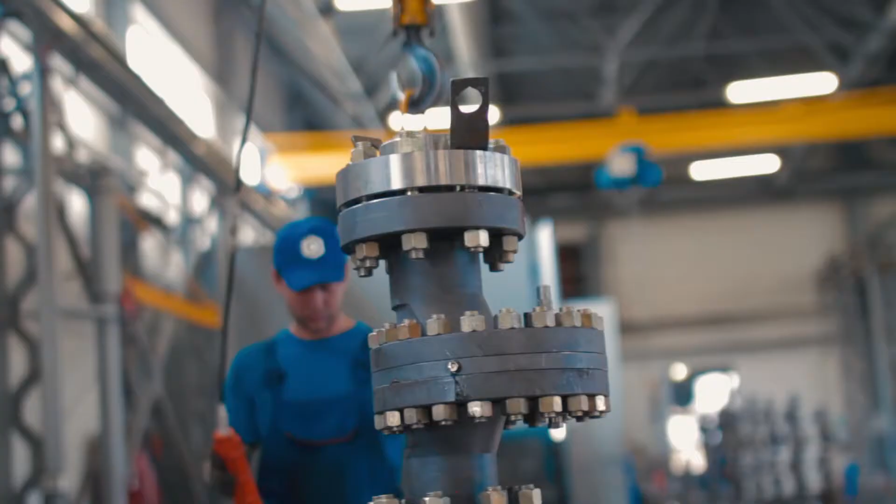Technovek is a multi-profile enterprise, the main production of which is oil and gas equipment. The plant produces equipment for sealing of oil and gas wells, shut-off valves, filtration equipment, water injection distribution manifolds for reservoir pressure maintenance systems, as well as group measuring units.

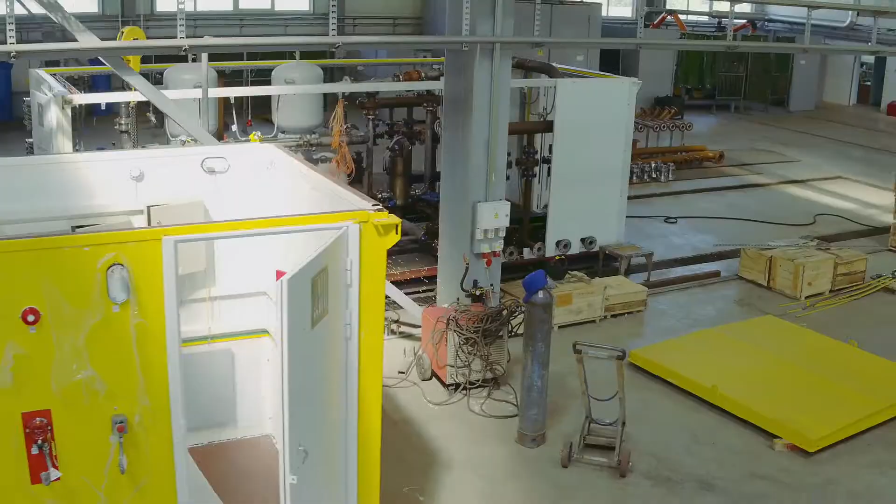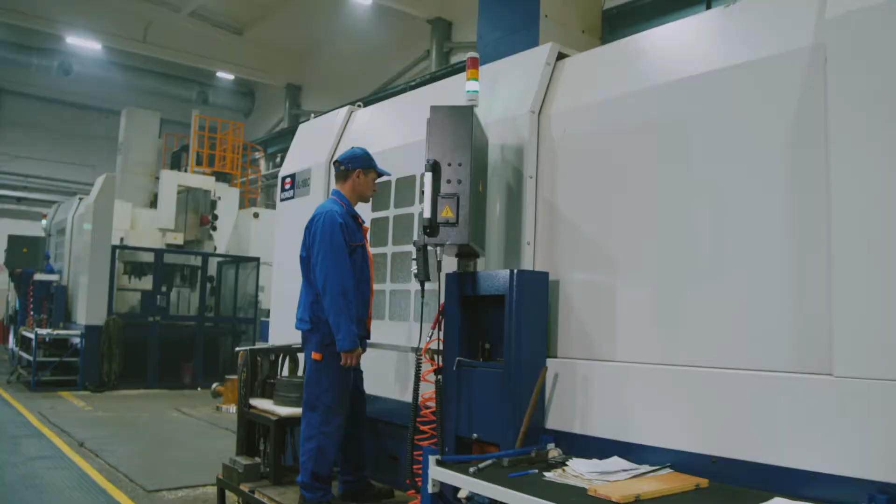The company has developed a comprehensive development program which secures the increase in production volumes and development of new products, increasing production efficiency and competitiveness, reducing the cost of products, expanding the market, and creating additional jobs.

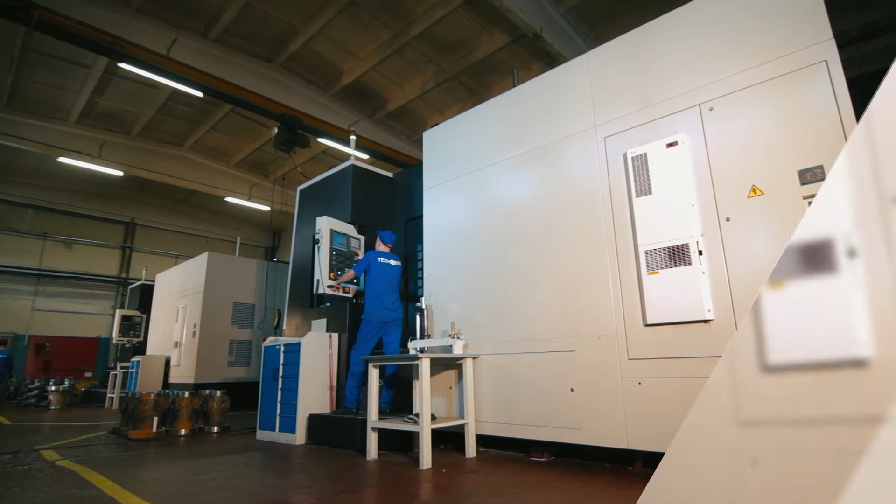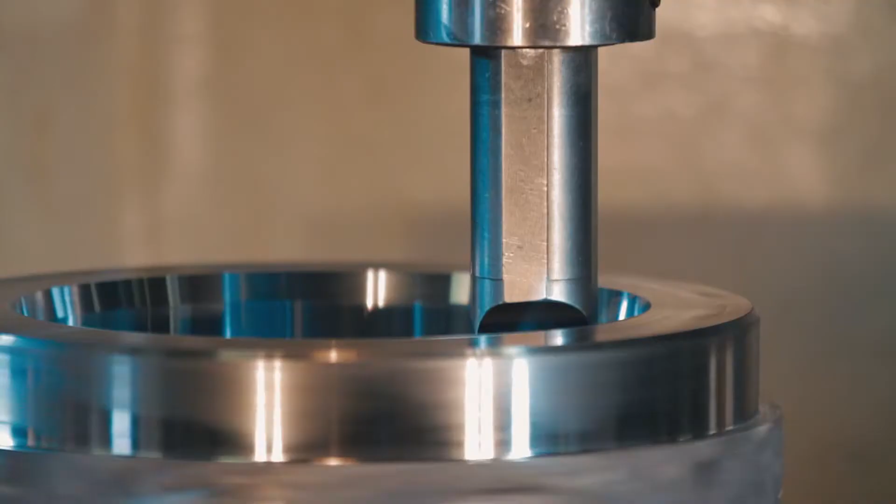The quality management system implemented at the enterprise meets the requirements of the national standard GOST ISO 9001:2015, which guarantees high quality of products at all stages of production. The manufactured products of Technovek meet the requirements of API 6A International Standard of the American Petroleum Institute for Wellhead Equipment.

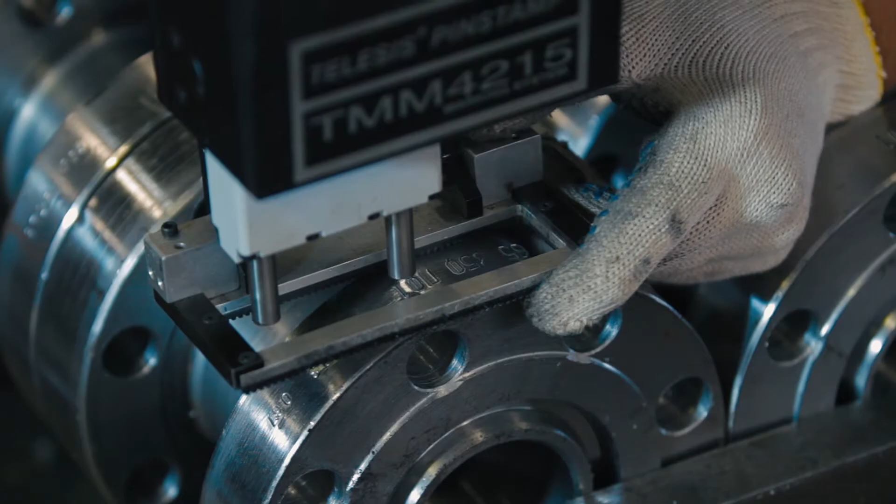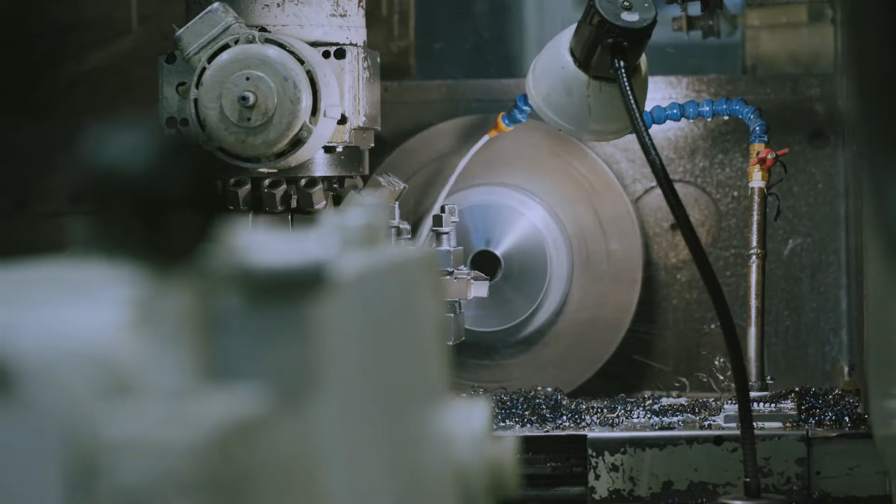The quality management system meets the requirements of Q1 standard. Production efficiency growth is one of the company's main tasks, which is solved by improvement of internal business processes by means of instruments for lean manufacture.

The Sightline Enterprise Resource Management System has been implemented. With the help of this system, the accuracy of strategic and operational planning, and integration of production planning systems with systems of design and technological preparation, is increased.

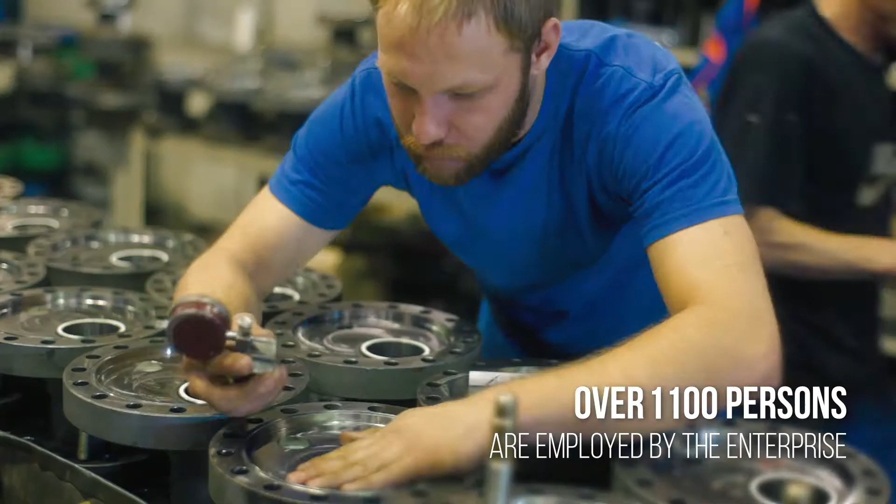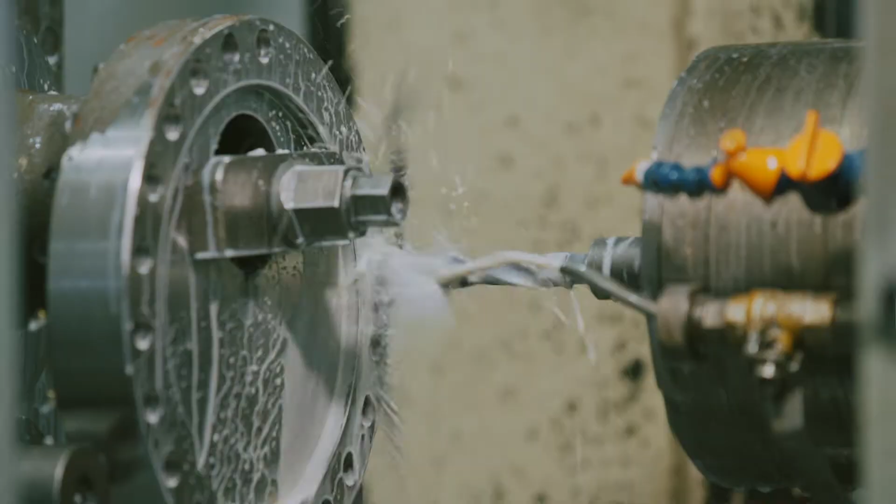The company employs more than 1,100 people whose average age is 35 years old. Besides decent wages and basic social guarantees envisaged by the state, the enterprise also offers each employee a number of additional benefits.

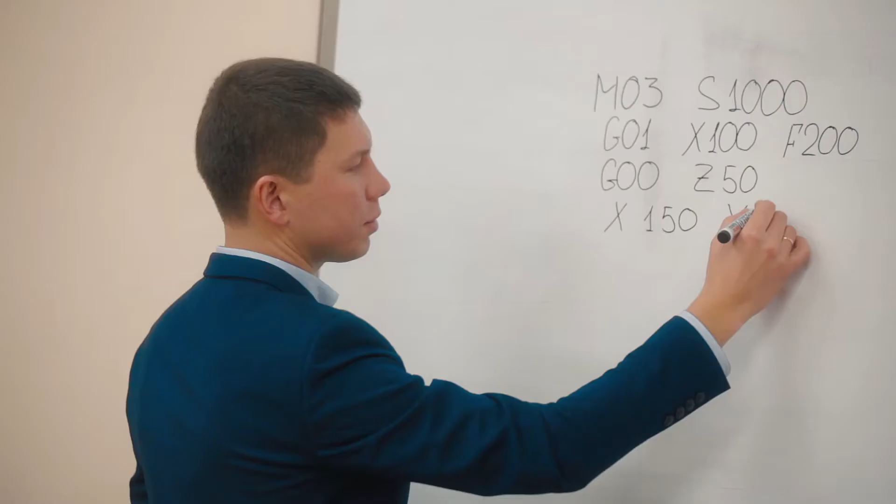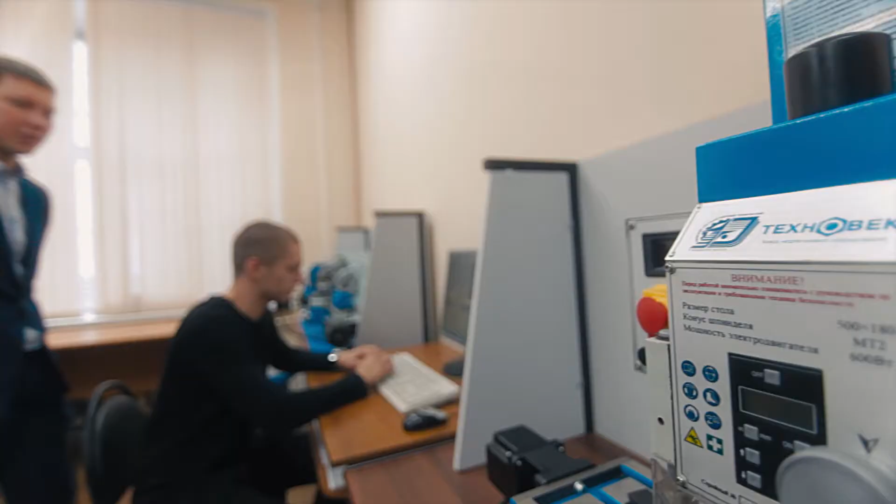A laboratory of CAD end-to-end systems works on the basis of the Votkinsk branch of Izhevsk State Technical University. The students have a real opportunity to get acquainted in practice with innovative high-tech technologies at the oil and gas equipment plant. Practical lessons in the equipment of the new laboratory will allow students to develop the skills and competence necessary for Technovek plant, as well as to carry out prospecting and applied research in the interests of the enterprise.

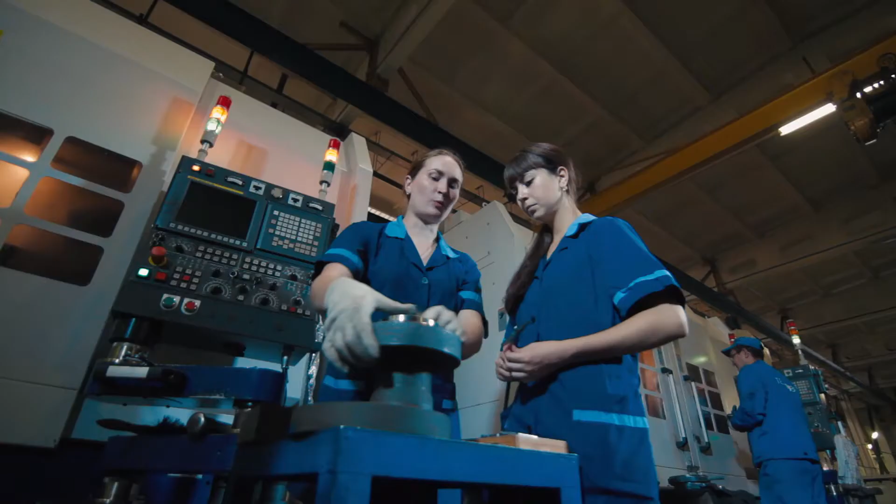During summer, 3rd and 4th year students undergo paid scientific and production practice. The students are offered a career at the enterprise.

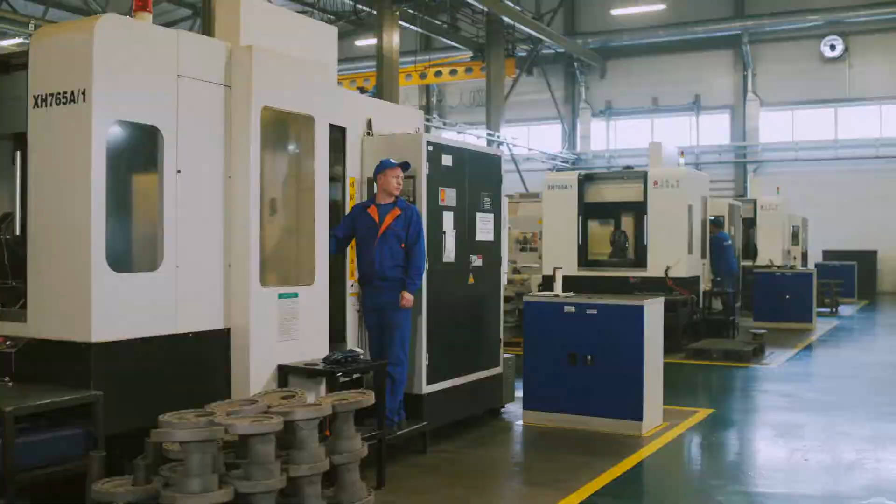The pace of technological development obliges Technovek oil and gas equipment plant to constantly monitor modern trends in mechanical engineering by improving the production process.

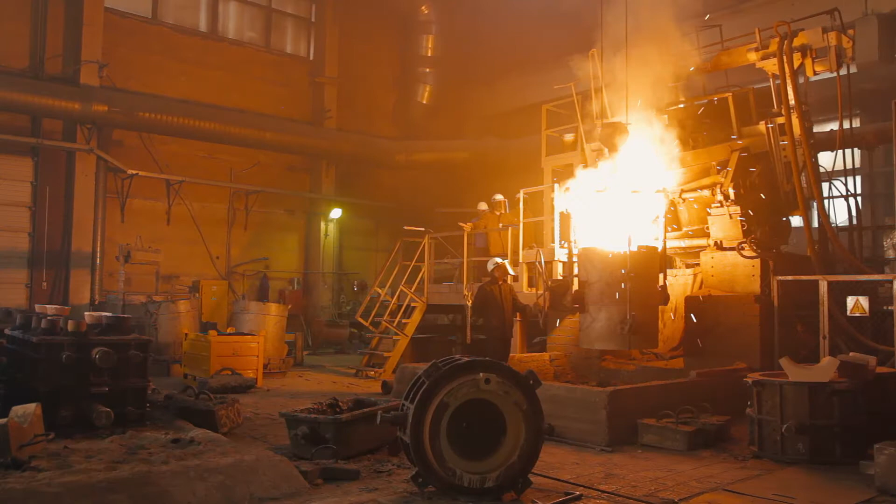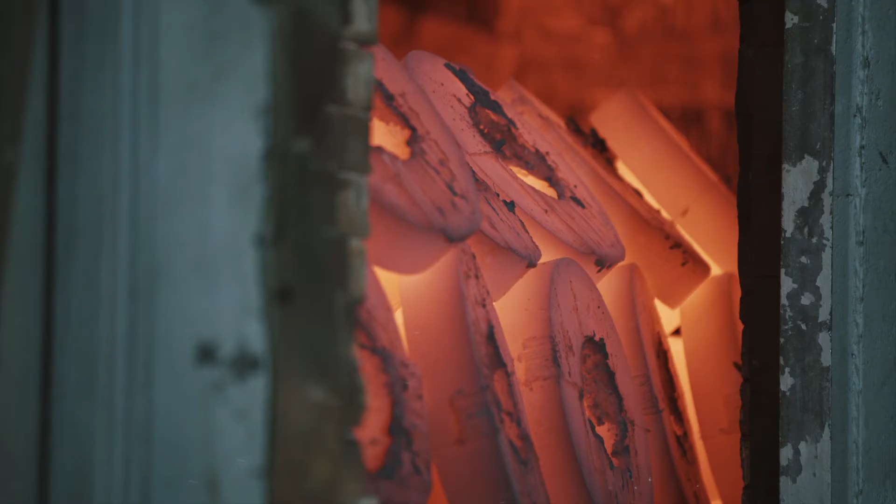Over 100 design engineers and technologists work on implementation of innovative technologies. At the enterprise, there's an own foundry that allows, regardless of external suppliers, to reach the highest quality of manufactured products and at the same time to lower considerably the expenses for their manufacture at constant quality control.

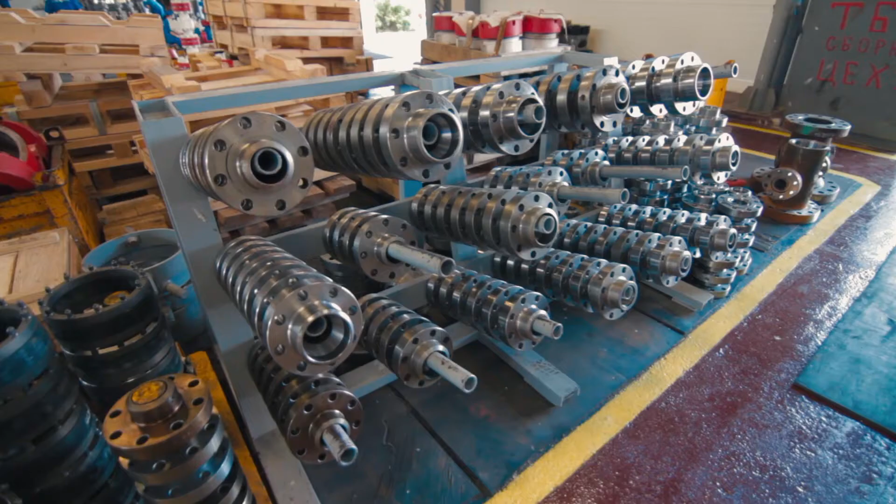While constantly increasing its market share, the enterprise outputs more than 10,000 products per month, of which 6,000 are gate valves and 700 are wellhead valves.

The company covers an area of over 700,000 square meters. Each production shop is located in a separate building. More than 400 equipment units are installed at the enterprise.

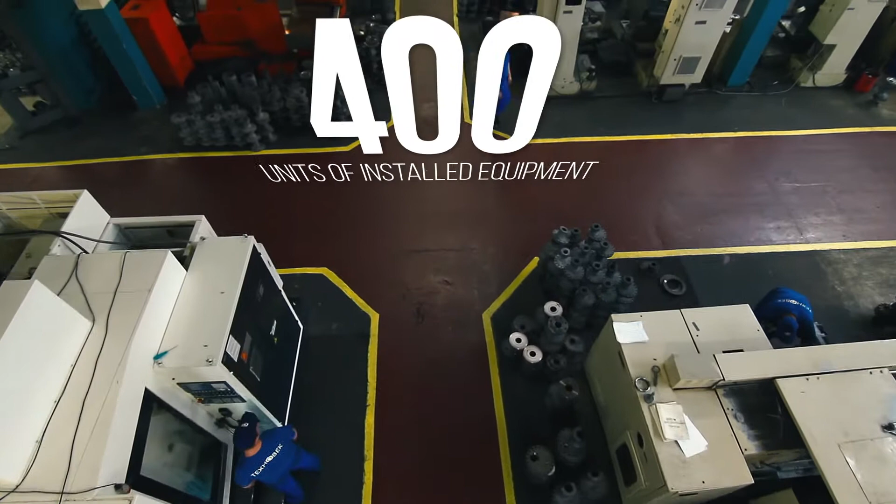Constant growth of production allows erecting new workshops and expanding the park of machines every year by purchasing modern equipment from leading manufacturers. The plant design department has an internal specialization in products and is able to solve complex technical problems.

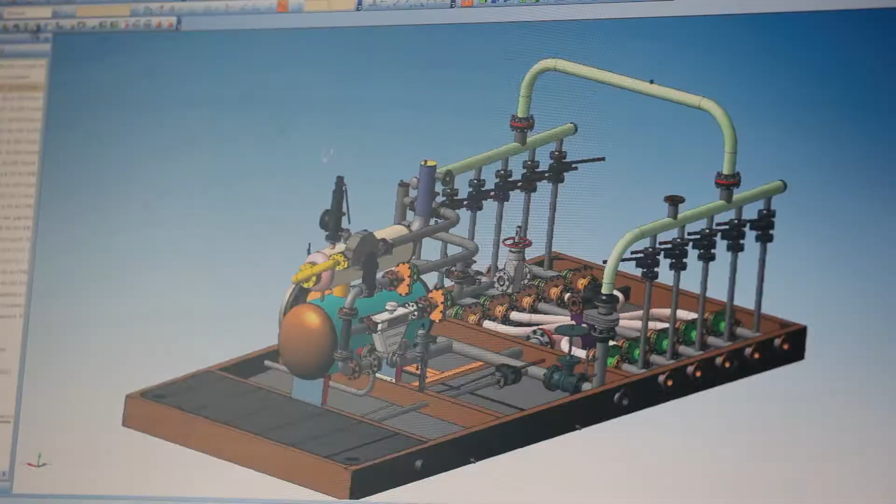Design, documentation, and change management are carried out in accordance with the requirements of the Unified System for Design Documentation. Over the years, the design department has registered 33 patents.

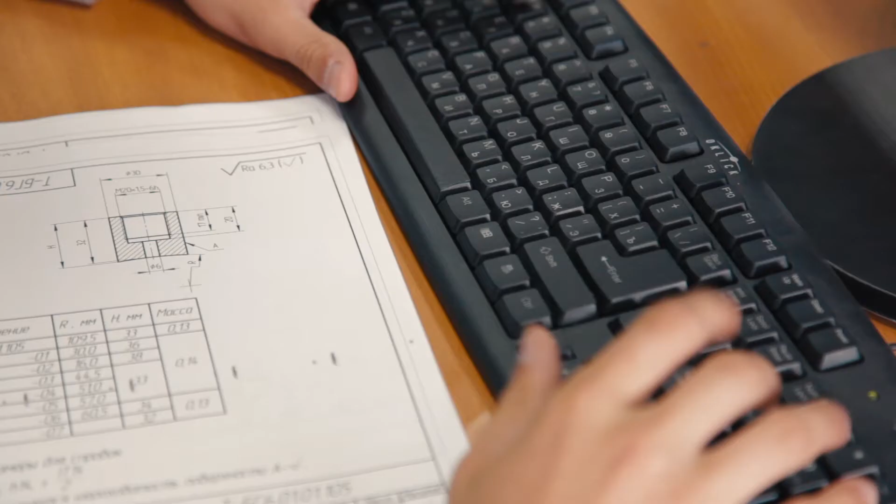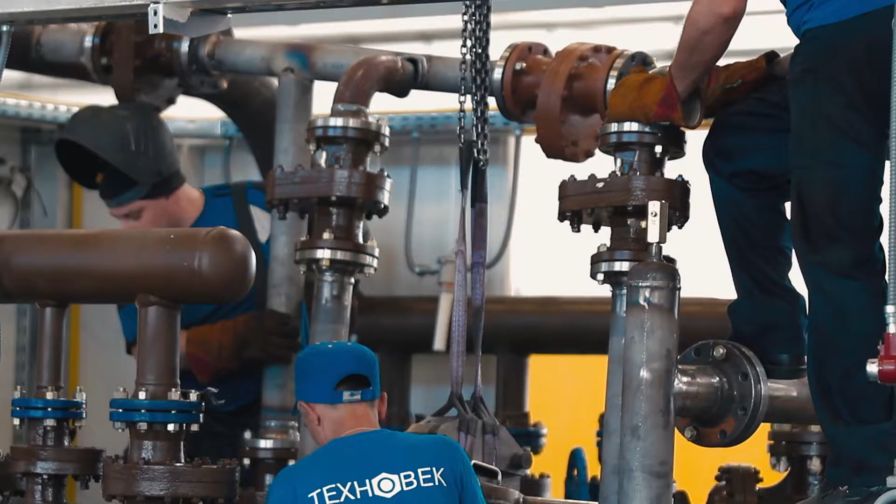The established feedback with clients allows designers to constantly carry out works on improvement and modernization of manufactured products. Every year, new equipment is developed and put into batch production, whereby the most advantageous solutions for production of highly functional equipment at a more competitive price are found.

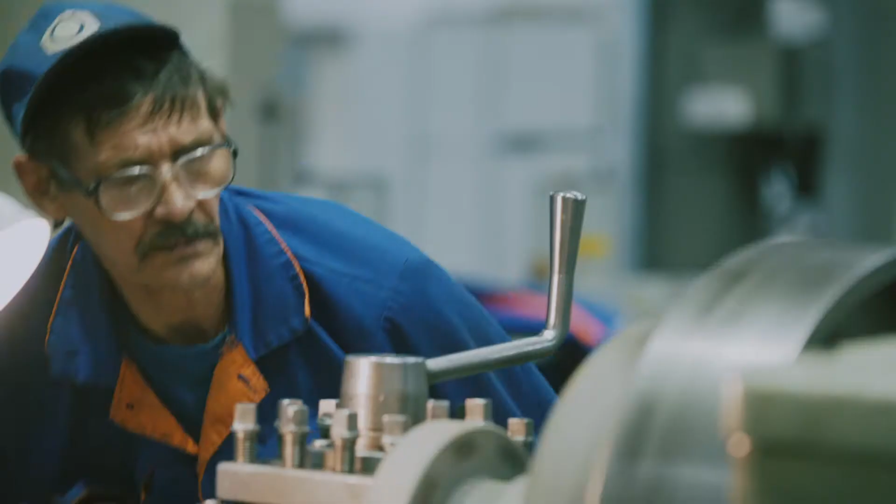The company regularly undergoes external and internal audits of the quality management system for compliance with the requirements of ISO 9001 and API 6A, the results of which confirm the compliance of manufactured products with international quality standards.

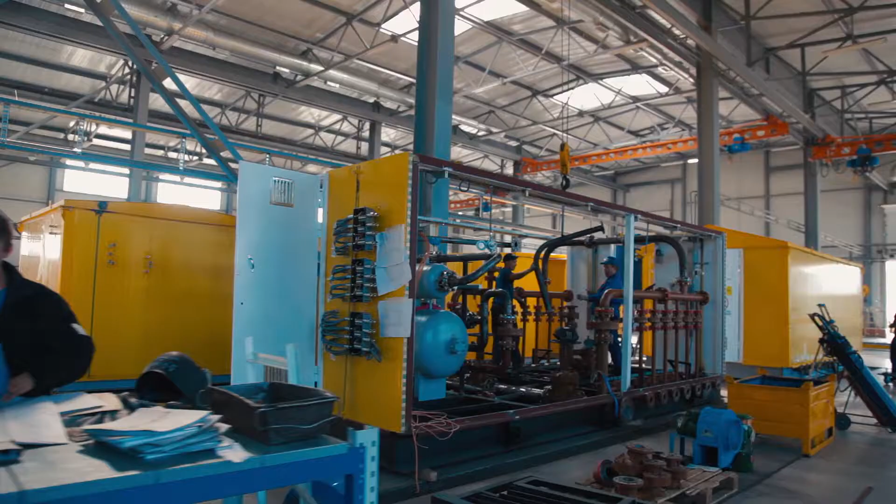The product range of Technovek oil and gas equipment plant includes more than 250 various products, each of which has a large number of modifications and design versions, including export versions.

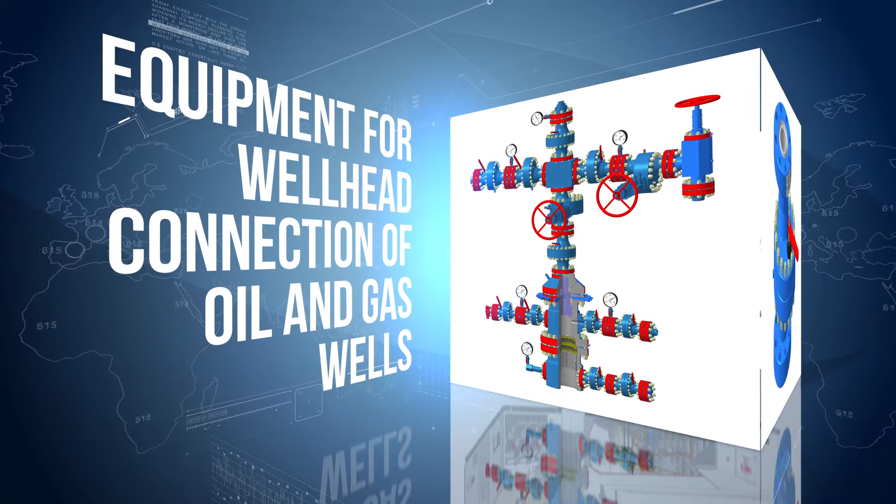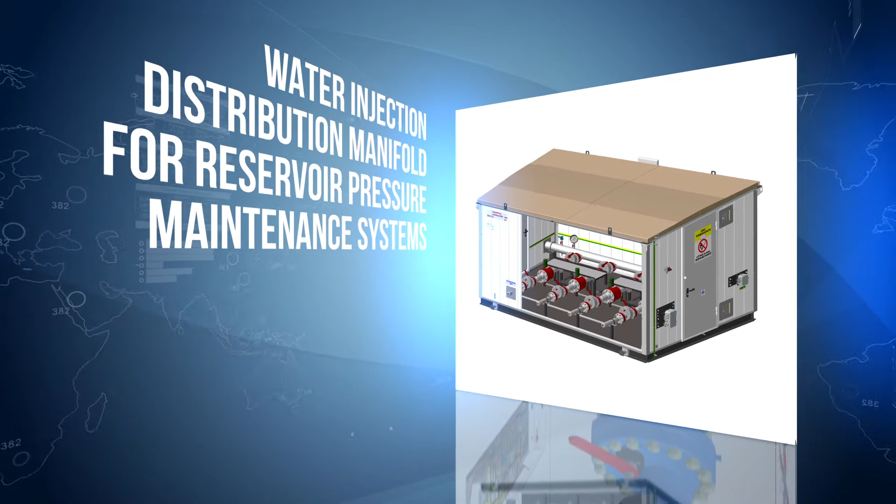The main place among the manufactured products is occupied by equipment for wellhead connection of oil and gas wells, shut-off and control valves, group measuring units, water injection distribution manifolds for reservoir pressure maintenance systems, filtration equipment, pipeline isolation connections, and measuring devices for reservoir pressure maintenance systems.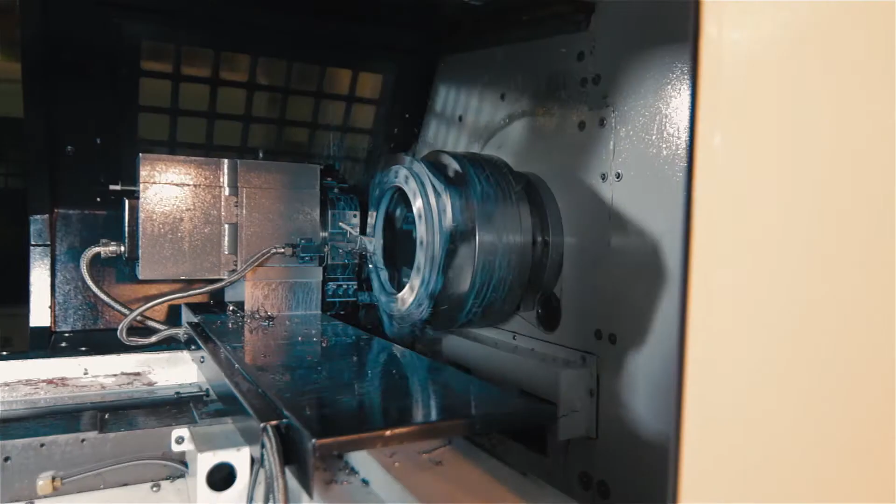Technovek plant of oil and gas equipment offers more than 100 modifications of wellhead equipment and also manufactures equipment on the basis of the customer's technical task.

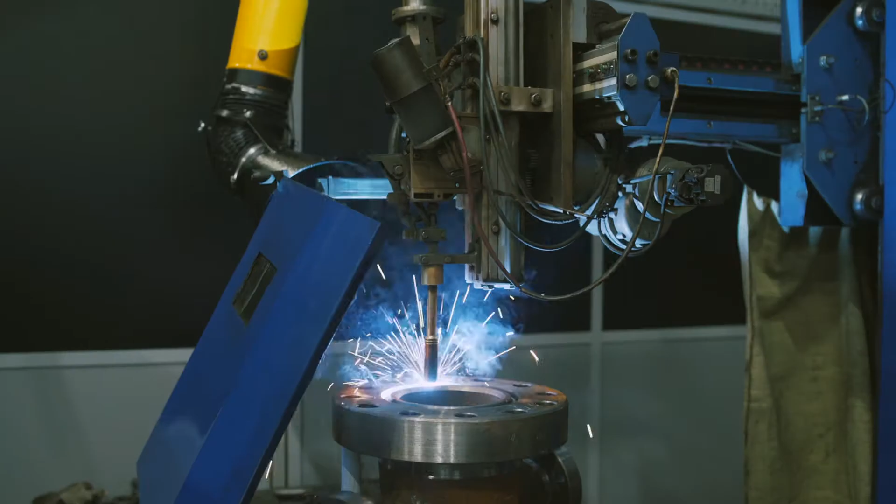The XT can be equipped with gate valves and throttling devices with hydraulic or electric drive. The disc valve gate developed and produced at the enterprise is widely used for work as a part of Christmas and injection trees, water injection distribution manifolds, or for installation of high-pressure pipelines.

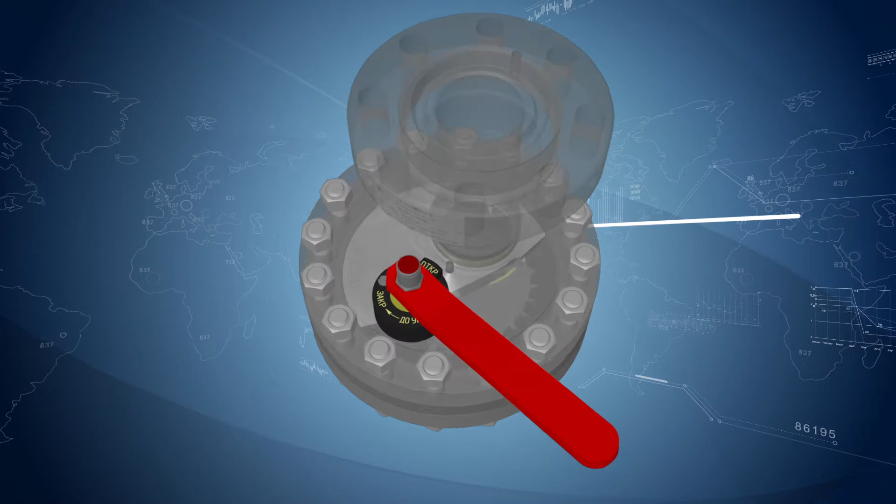In comparison with gate valves of classical construction, the disc valve has a number of advantages. Opening or closing of the valve is operated with a handle in just a few turns. Free internal volumes are minimal, which makes it possible to close or open the valve without preheating at low temperatures. The costs for its maintenance are considerably reduced.

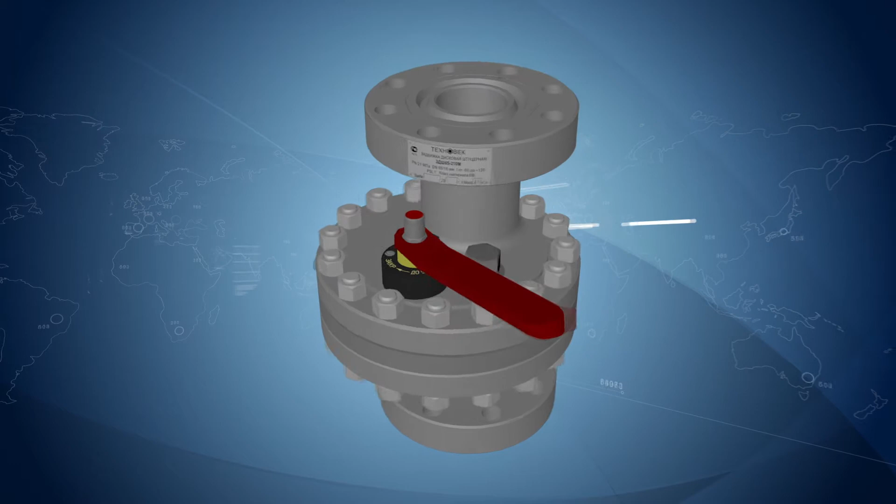On the basis of the butterfly valve, we have developed the butterfly choke valve, or BCV, and its modifications: the 3-position butterfly choke valve and the revolver-type butterfly choke valve. On the basis of these valves, the line of wellheads for wellhead sealing is produced.

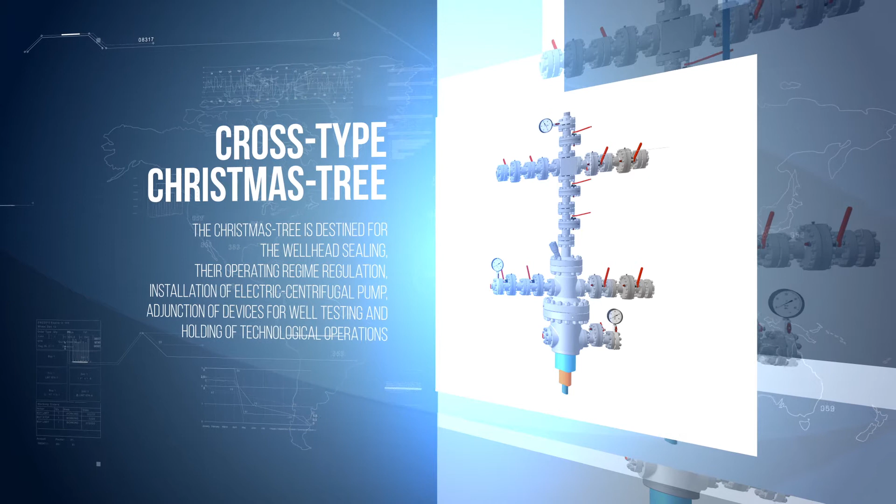Cross-type Christmas tree. The Christmas tree is for wellhead sealing, operating regime regulation, installation of electric centrifugal pumps, junction of devices for well testing, and holding of technological operations.

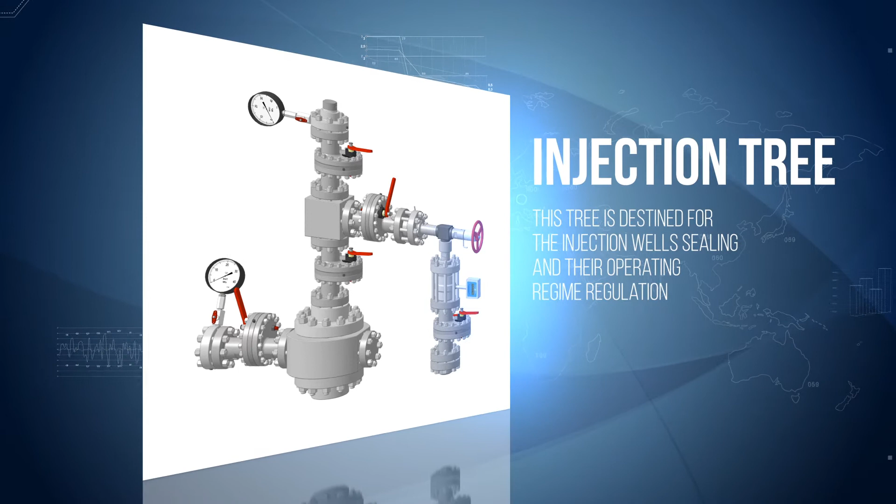Injection tree. This tree is designed for injection wells sealing and their operating regime regulation. Dual injection tree: wellhead fittings for the simultaneous separate operation, pumping into reservoirs by lifting pipes hung in parallel.

Sucker rod fittings, to be applied for the sealing of wellheads operating with sucker rods.

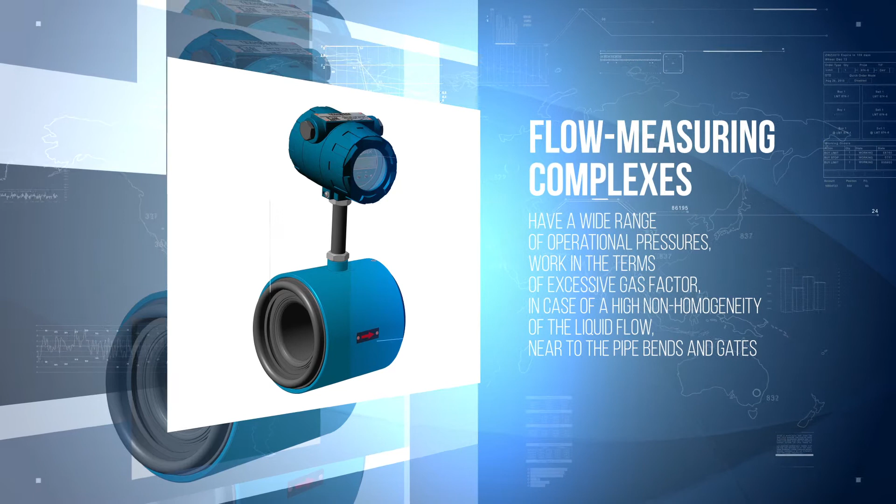The company produces flow measuring complexes of electromagnetic and vortex acoustic principle for reservoir pressure maintenance systems. The devices have a wide range of operating pressures, and work under increased gas factor conditions with high heterogeneity of the fluid flow near the curves of pipelines and shut-off elements.

Group measuring units enable the most accurate and efficient measurement of the mass flow rate of crude oil and the volume of free oil gas. The units can archive and transmit measurement data from any well connected to the unit to the oil field control center.

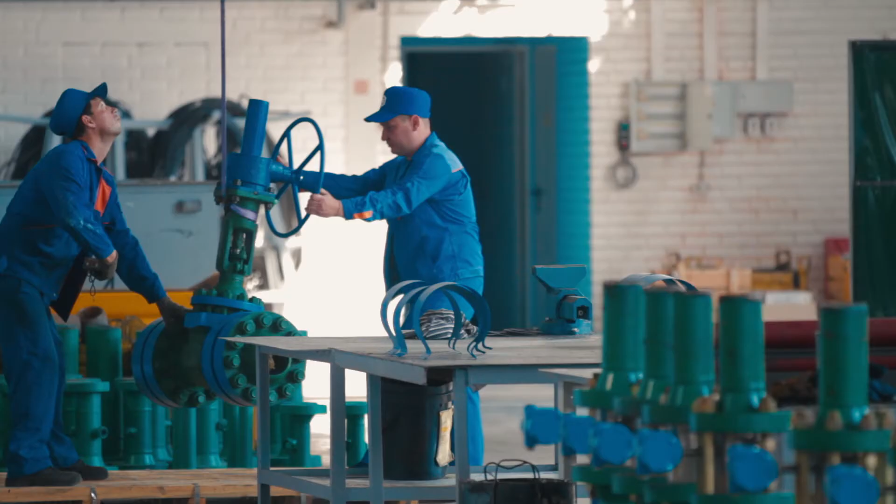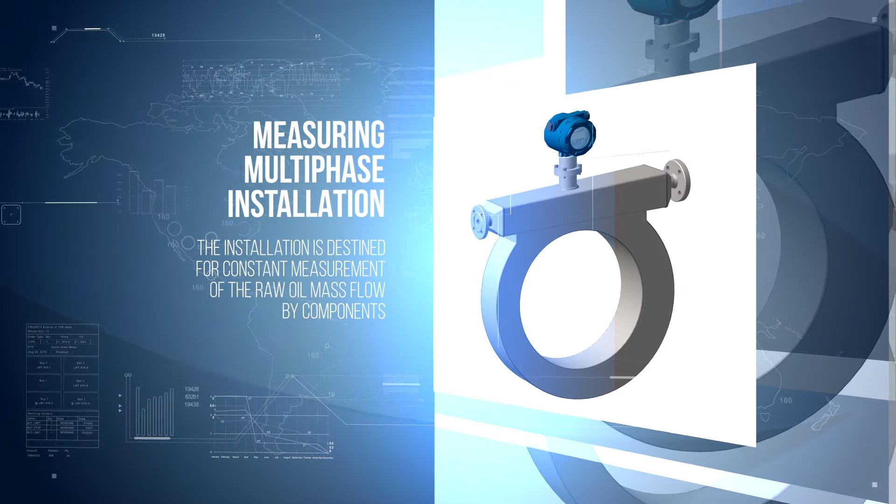No less attention is paid to the development of equipment that can replace imported equipment in the Russian and international markets. The specialists of the company have developed a unit designed for continuous measurement of mass flow of crude oil by components. It is able to replace American flow meters as part of group measuring units, or to work directly near the well, making measurements without separation of crude oil. The unit is undergoing pilot testing and is preparing for mass production.

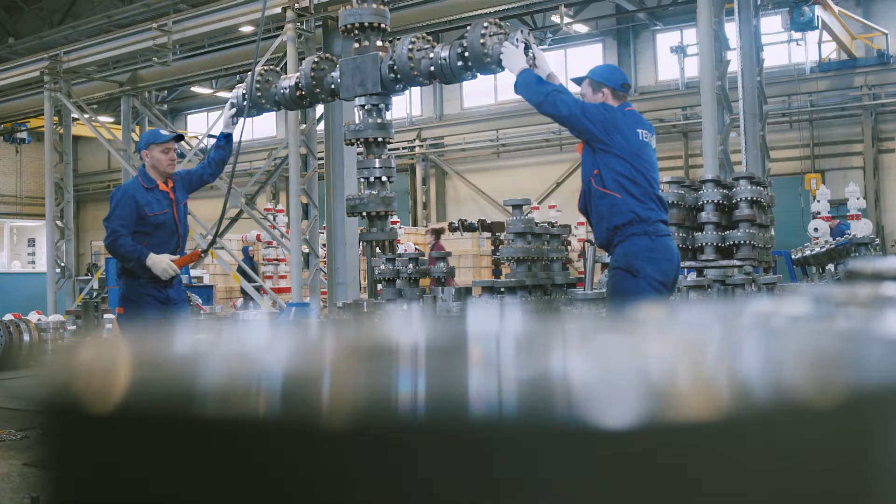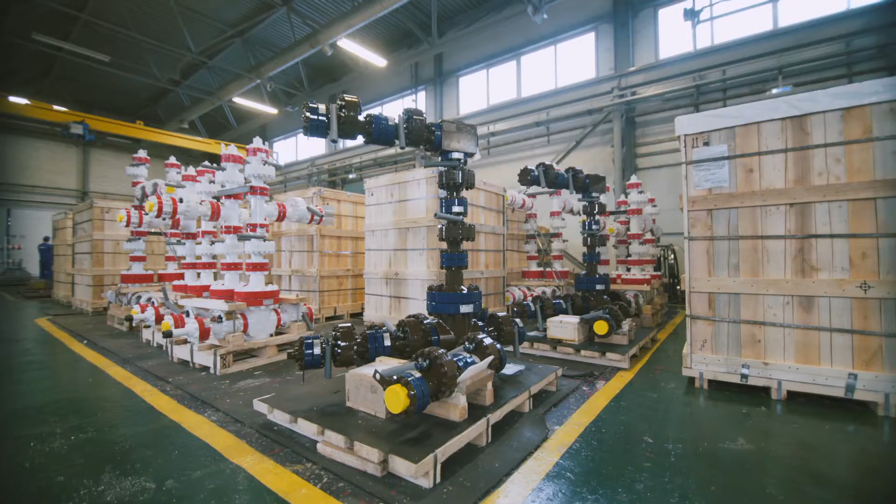The products of the Technovek brand were highly appreciated, and Technovek plant of oil and gas equipment was recognized as the best manufacturer of X-trees in Russia in 2012 and 2015, according to the rating of 42 oil companies, leaders of the Russian oil and gas market. The best confirmation of the quality of products is still the positive feedback from customers.